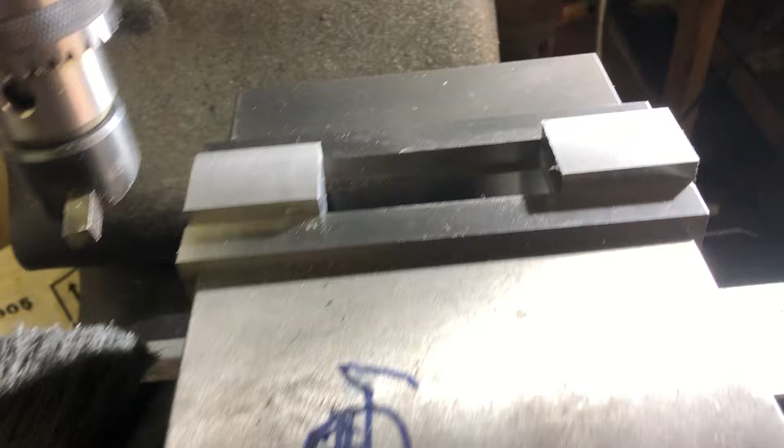Okay, so we finished our pass with the fly cutter, just to make sure that these two blocks are the same height, and we're going to make sure that our grooves are the same depth in each block, is why I made that initial pass.

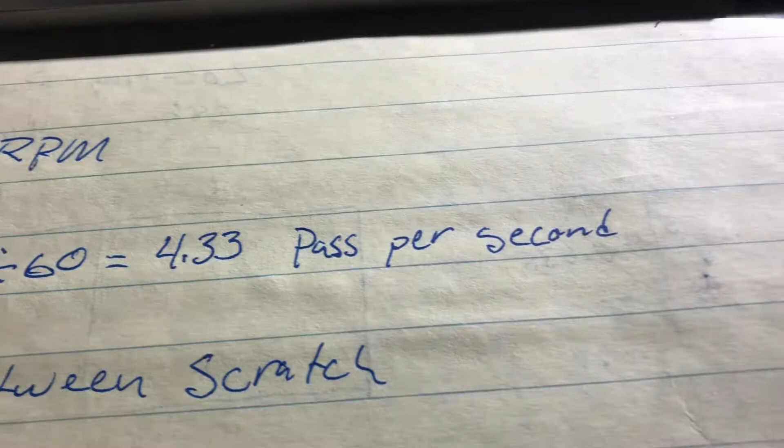So anyway, here is the math. I want the grooves about 20 thousandths apart, and we are turning at 260 RPMs. So here's what I did, 260 RPMs. We got 260 divided by 60, that's 4.33 passes per second. And I want 20 thousandths between each scratch for the vent lines.

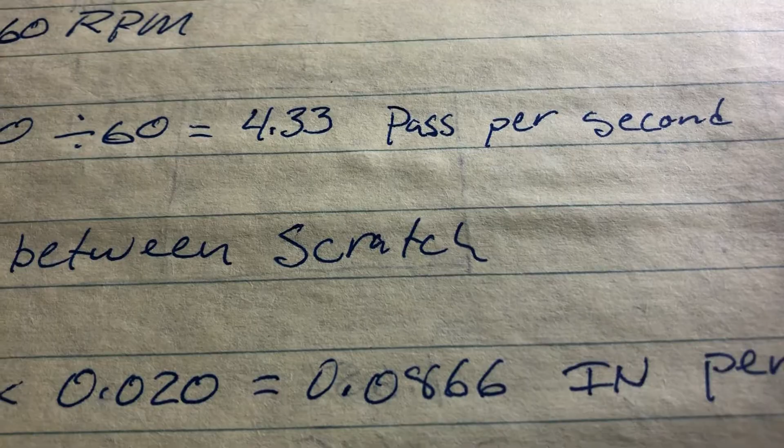By vent lines, this is what I'm talking about. We're going to try for a nose pour mold, and we want the vents to let the air up and out away from the bullet as the lead pours in.

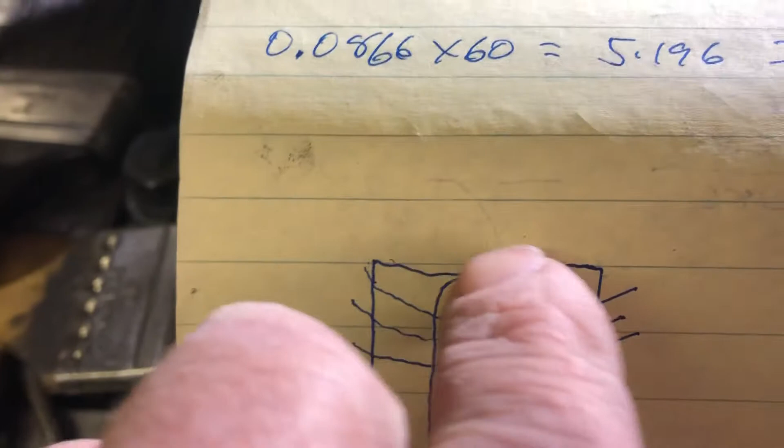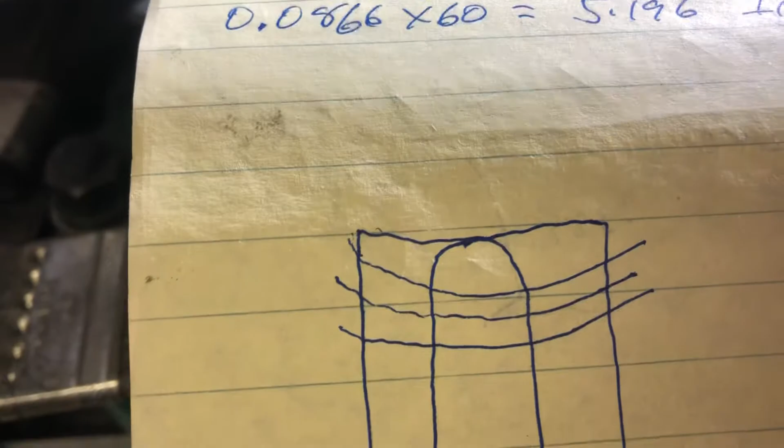I don't know that it really matters which way the scratches go. You could probably even cross hatch it so you had air move in each direction away from the bullet. I just feel like if it's going up and out away from the bullet, you're going to get a better result. I've got molds that are done both ways, with crosshatch and with the vent lines moving up and away, and they both seem to do just fine. I've also got bullet molds that are totally smooth, and they seem to do okay too.

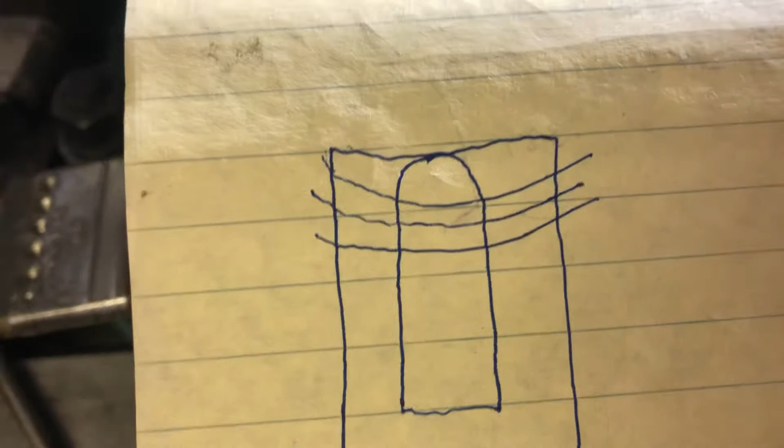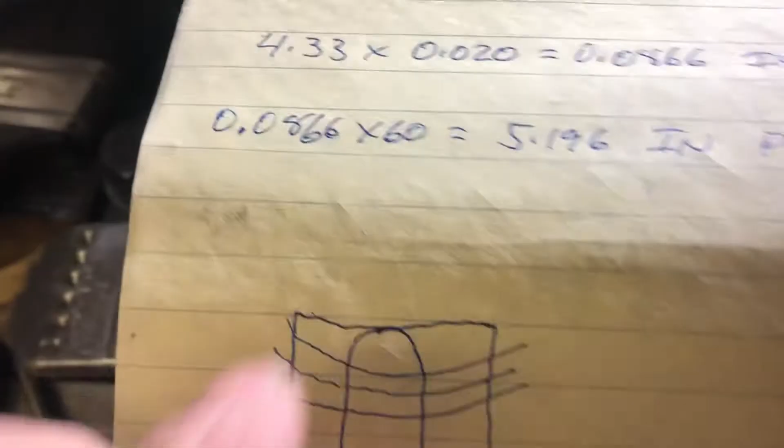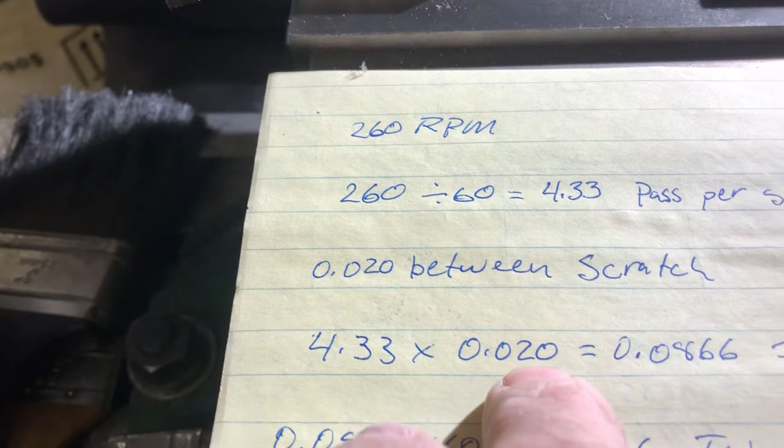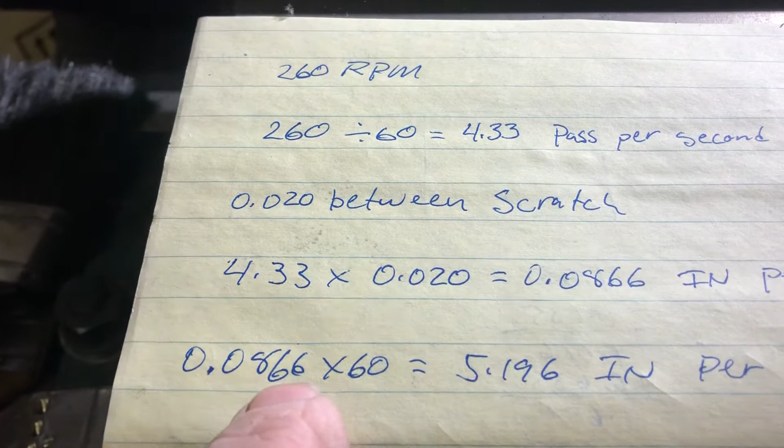So anyway, 260 RPMs divided by 60, 4.33 passes per second, 20 thousandths between the scratch. So we're going to go 4.33 passes times 0.020. That's our forward movement of 0.0866 inches per second. I'm going to times 0.0866 times 60 seconds in a minute, 5.196 inches per minute.

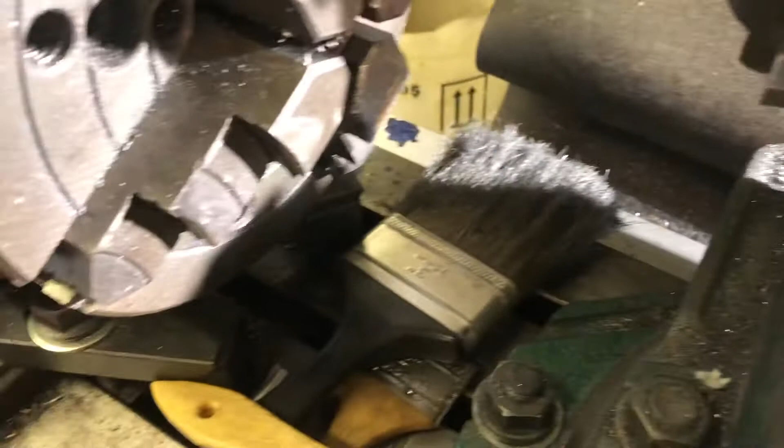Set that out of the way and turn the little DRO on. We were at 5, so this next cut we're going to take at 7. Let's move it up out of the way. Oops, wrong direction.

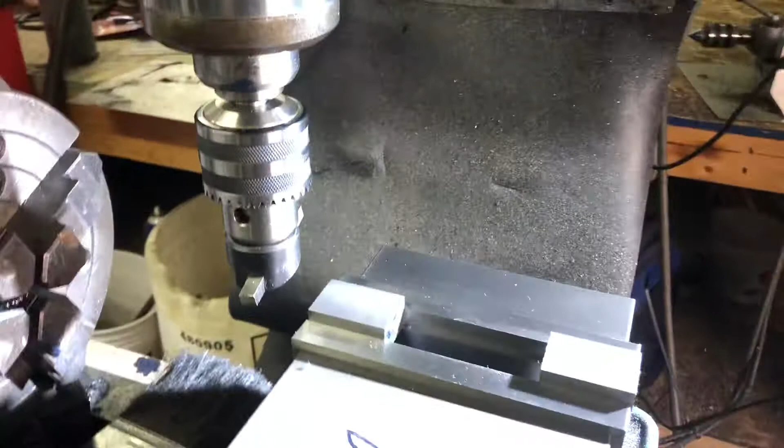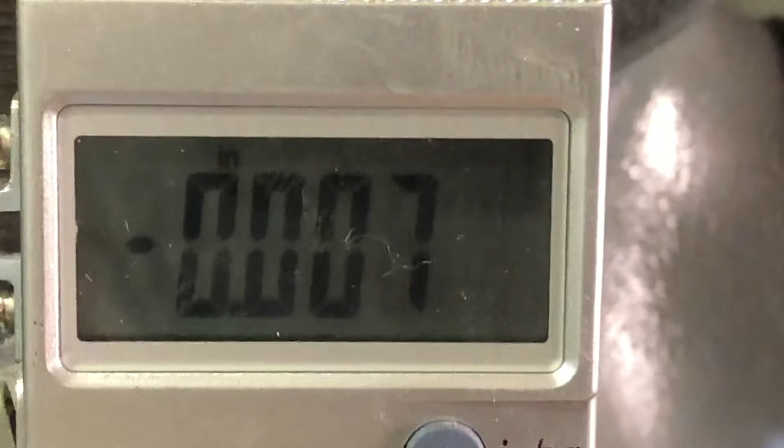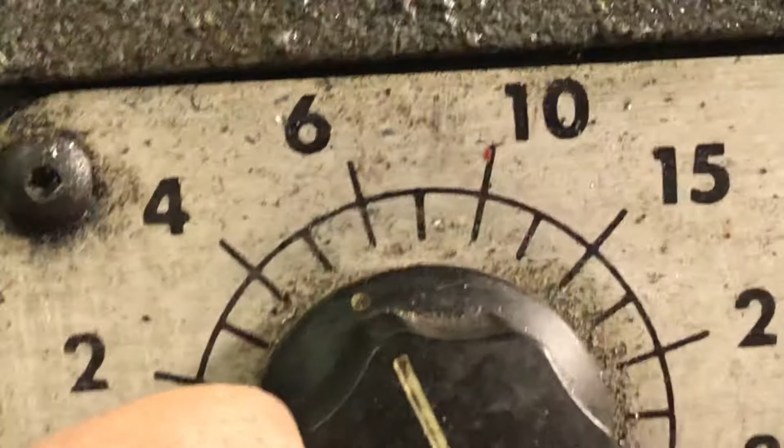And we'll come over past the first block. We come plenty past it, and that should be okay. I'm going to move back down to 7 thousandths. There we go, 7 thousandths. Lock that in. That should give us our 2 thousandths deep cut. Then we're going to set this at 5.19, which is about 5.2.

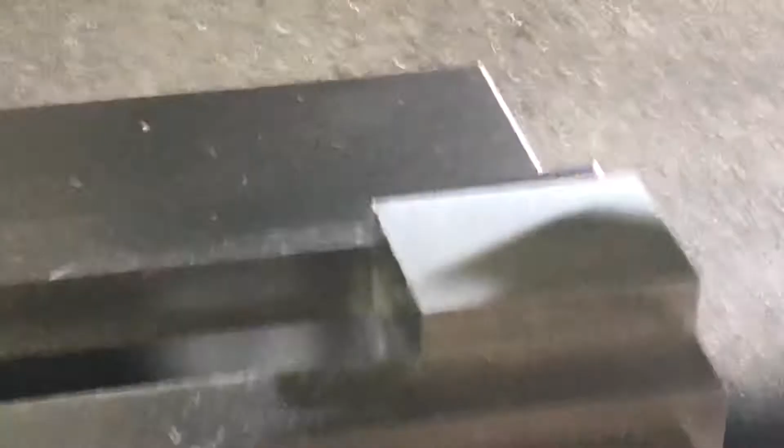And that's just a frickin' shot in the dark on this thing, if that's accurate or not. But that's what we're going to roll with, and we're going to see how this thing works. It doesn't matter if the scratches are exactly 20 thousandths apart. I mean, that's just a number I pulled out of my head to use.

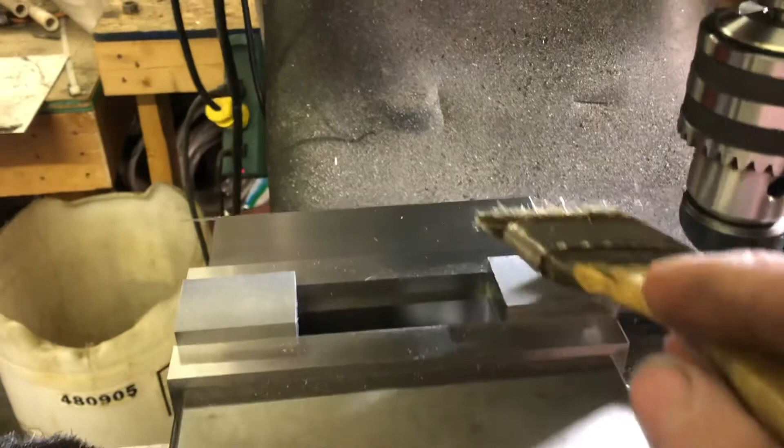So zoom back out, put a little oil on them. And here we go. Oops. I kicked out on reverse, so I went up to high range, which I'm in the back gears back here. So I need to go to low range. And there we go.

6 inches per minute. 5.196, which, like I said, I got no idea if this is 5.196. It's showing about just a touch over 5. So it'll be fine regardless. If it's not, we'll face it off and cut it again.

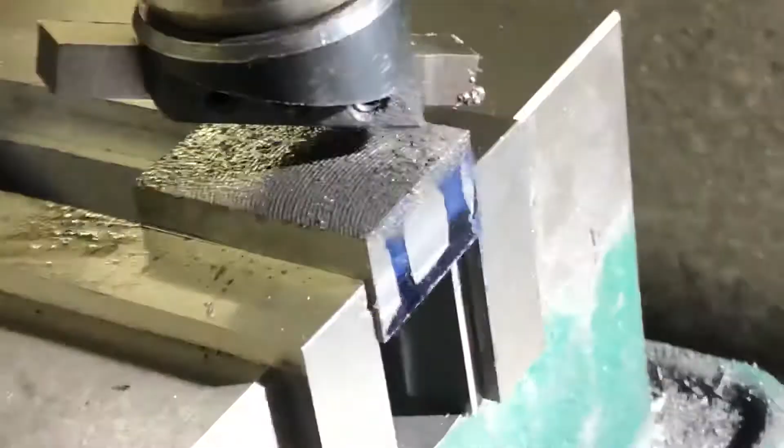So here we go. That is flying. And that looks pretty good. I'm going to stop it as soon as it quits the cut. And shut the mill off, and hopefully, of course it didn't. Hopefully we can get this thing back. Okay, we're past that, past the edge of the block there.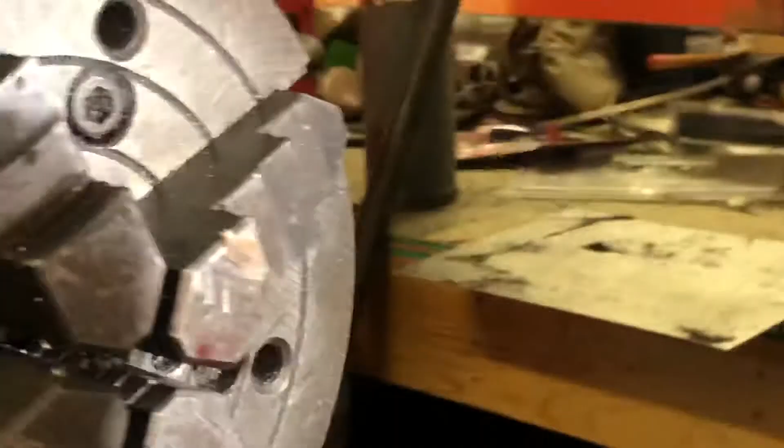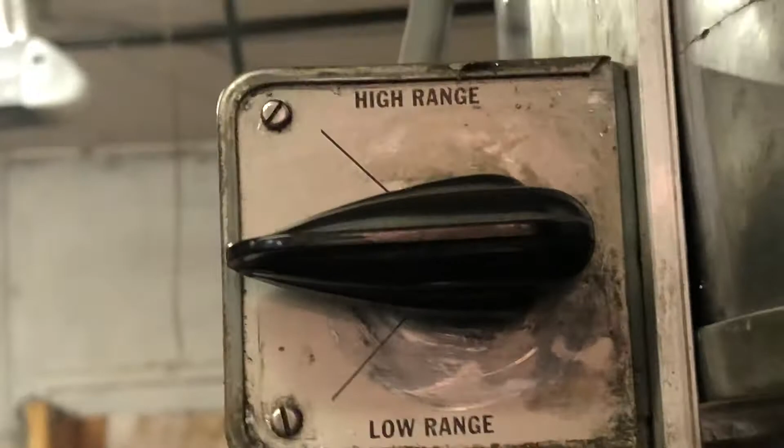So let's move forward to the next block. Yeah, dang. Okay, there we go. So when this is in the back gears, it's awful hard to spin that spindle. So let's crank it up again. And there again, we kick it to high range. I can't stress enough how much attention you got to pay to little details when you're doing this stuff. Low range. I've screwed up so many more than one part by just being in a hurry. And here we go.

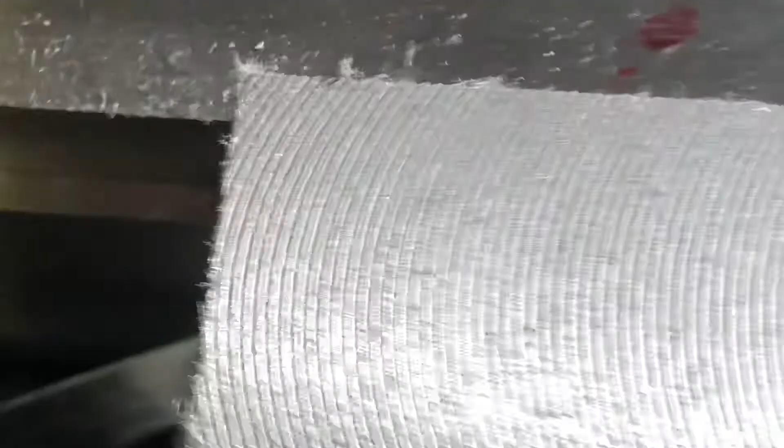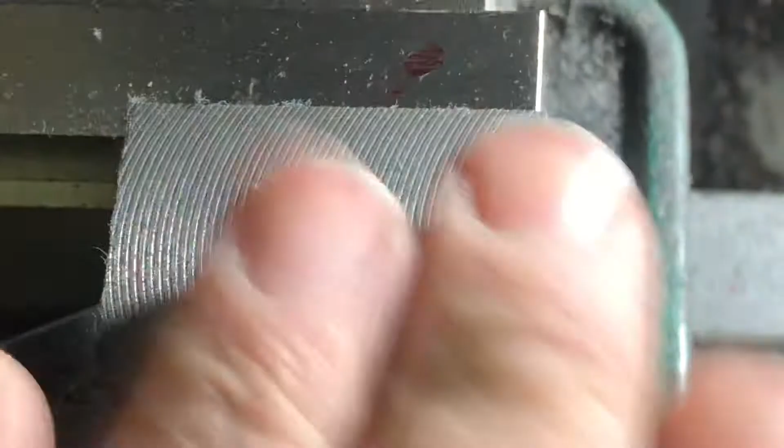As soon as it comes off the part, you want to shut it down, if you're doing it the way I'm doing it here. Let's wipe this first block off. Okay, there you can see the vent lines are all going the same direction. And that's a pretty rough finish. If this were tool steel, you could make a file out of it. So, and it actually probably would be a file if you were going to try and file some aluminum or something.

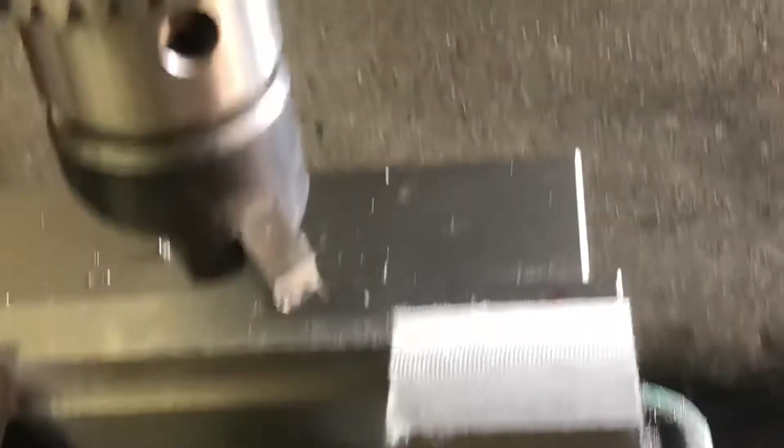So there we go. I think we're done with that. Let's raise the quill up out of the way. And we'll back this guy up. Let's back it up. Let's wipe these off.

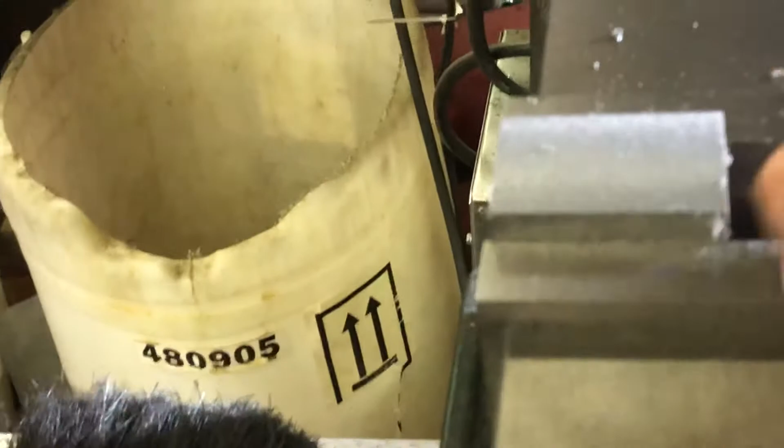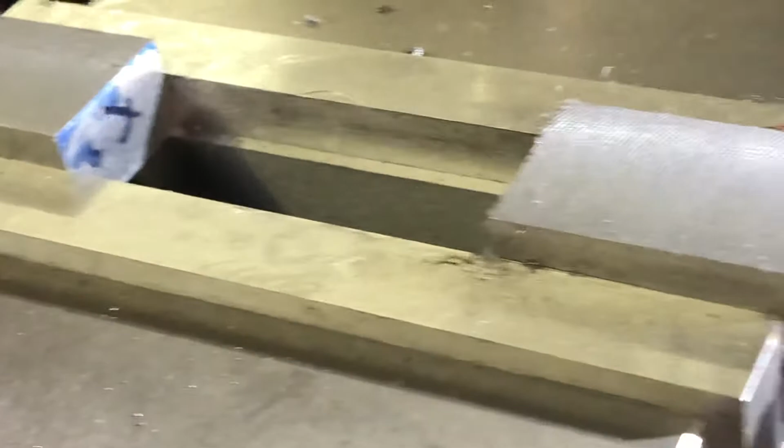And we're going to put X's on the ends of these things. Just for our next step, we're going to want the X's together. First, we're going to just kind of hit these on a piece of sandpaper. Knock the super high rough edges down. It should still leave us our vent lines, and we're going to clean the rough edge here. Not so much one here because the cutter was cutting into it this direction, but there's a little bit of a rough edge off of there, and a little bit of a rough edge off of there, and that end.

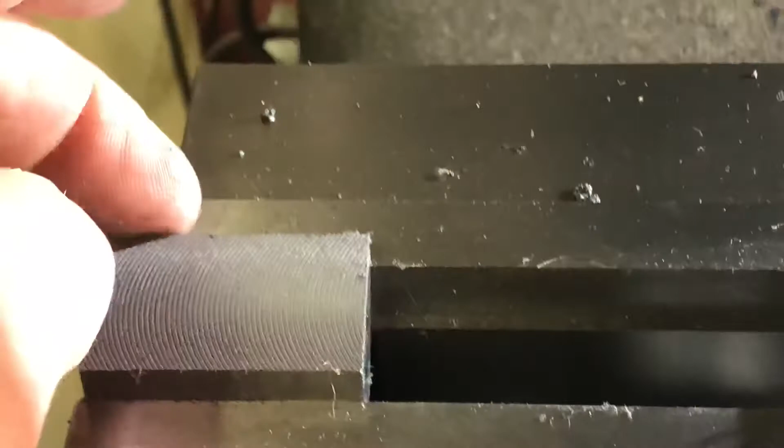So we're going to hit them with the file, just kind of clean the corners up. And say just a couple of passes on a piece of 220 sandpaper on a flat surface, and then we'll clean the vise and get ready to drill for the locating pins.